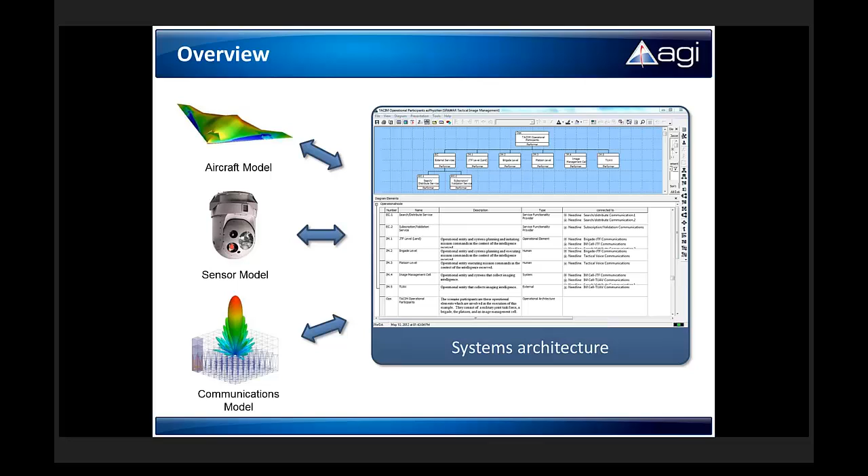If we get started, we might look at our systems architecture in a tool like GENESYS or Core. We have the representation of our system and its parts, which might include references to the aircraft model. Let's say we're talking about an unmanned aircraft. We might have aircraft model representations, sensor model information, or communications model—all the various important parts of the subsystems and the requirements for those. They might be mentioned or listed somewhere in our systems model, but they're not necessarily integrated with each other. That's one of the things we can do with STK.

We can use STK for collaborative system design and analysis. So if I start with my aircraft model—and by that I mean the physical representation of the model, the size and position of all the components, also the performance of that aircraft, so how fast does it go, how high does it fly.

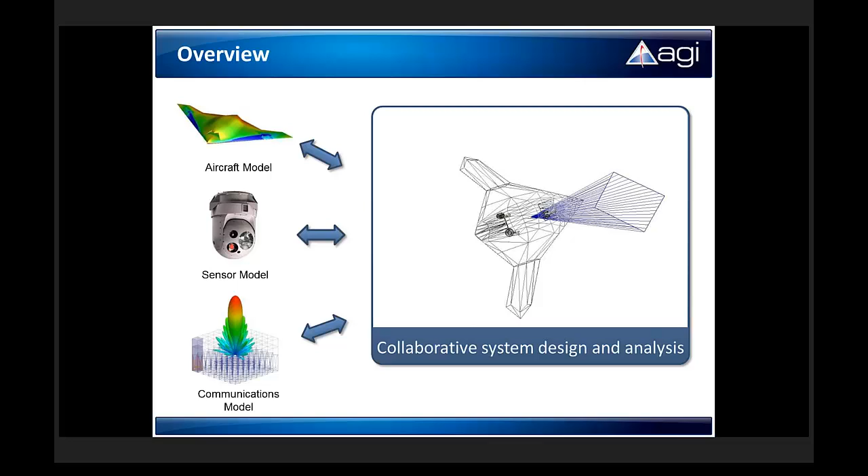To that I can add my sensor model. I know that my sensor, whatever sensor type I have, might have a certain resolution or capability as it stands on its own. But when I place that on my aircraft at a specific location, I can look at, in STK, combining my sensor model with my aircraft model. So as my aircraft maneuvers—maybe it turns and banks—that will affect the ability of my sensor to see things. Additionally, if while iterating on my aircraft model I add a new strake or piece of structure, that might impede the view of my sensor, and I could model that very easily within STK.

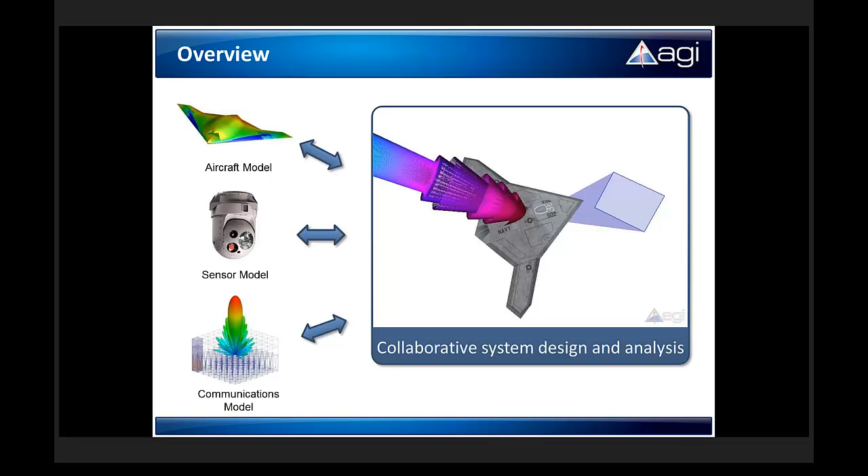Similarly, with the communications model—especially for an unmanned aircraft—communications are very important. Just like with the sensor, my antennas aren't ubiquitous; they exist at specific locations, and those locations may affect their performance. Also, as my aircraft maneuvers, that affects my communications performance, and so on. What this allows us to do inside STK is get a full representation of our aircraft, so now we see not only how each of the systems will work, but how they'll work collaboratively.

Additionally, we can look at mission-specific analysis. This unmanned aircraft doesn't exist in a vacuum; we didn't build it just to put it on a stand somewhere. We have missions, and those missions can vary—different locations, different purposes—and we need to be able to exercise our systems to make sure they not only function together, but function in these different mission environments.

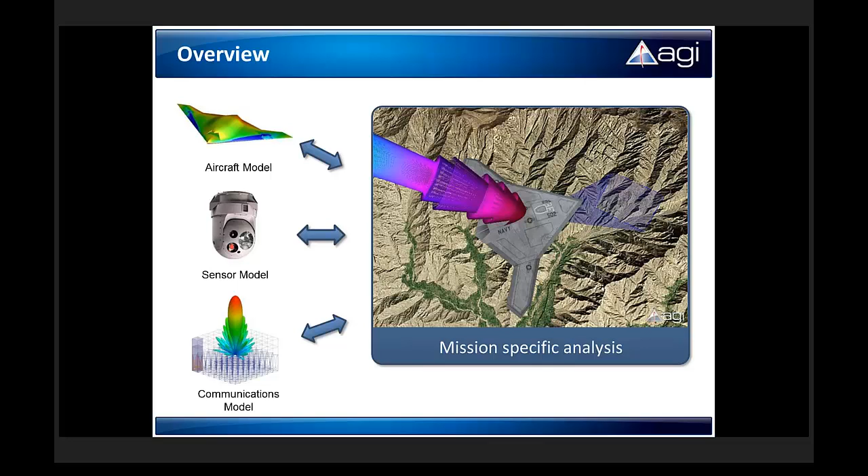If I'm flying my aircraft over the mountainous region of Afghanistan, it might be affected differently than if I'm in Singapore, where it's hot and humid and not as mountainous. So I can look at this to understand each specific mission thread and evaluate my system as a whole.

So if I take my unmanned aircraft, I want to take a picture of something. I need to use my sensor to take that picture, fly the aircraft to put it in the appropriate position, and communicate that picture up through my communication means to whoever wants to view it.

So we can view that all in STK, and here we have a representation, this colorized heat map that shows what we're able to see and how well we can see it.

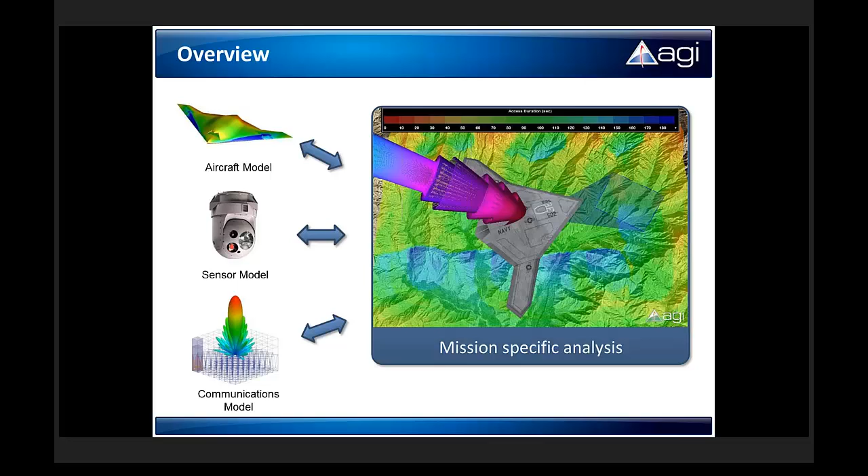The ultimate goal is end-to-end system design. So I start with whatever requirements I have, or whatever my system model might be, like in Core or GENESYS. I iterate on that model, combine it, get a full representation throughout the system together, and as we implement that system, incorporate that analysis back into my system model.

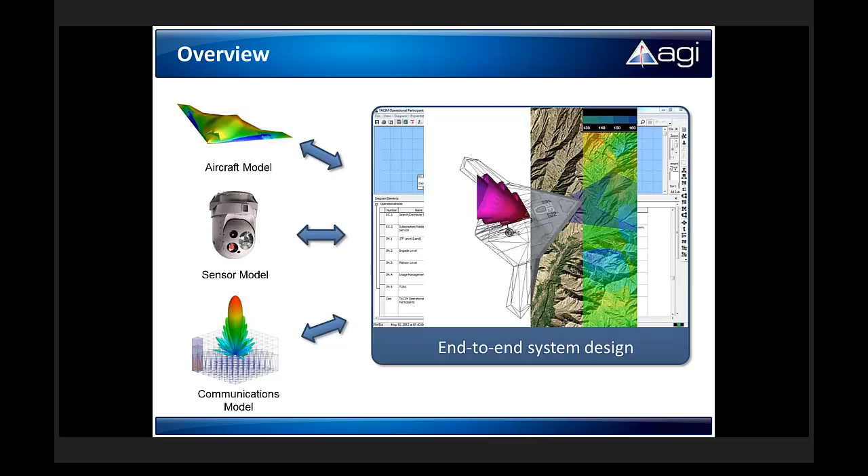So how do we do this in STK? What are the models that we can use? Well, we have a couple different models.

STK focuses on dynamic objects. One of the things we start with is vehicle motion models, like aircraft. STK originally started as a satellite tool, so we can model the motion of aircraft, satellites, ships, ground vehicles, underwater vehicles, or static objects like facilities. We want to look at their position and attitude because that will affect their subsystems.

Additionally, we can apply sensors. We can add a sensor to any of these objects, and that sensor might represent a radar or an EOIR sensor. We can look at how they're pointing, how they'll be affected in different missions, and also their environment, which leads me to the next point.

We model the environment very specifically in STK. We can model everything from the terrain on the ground to the atmosphere, different regions of the atmosphere, all the way up through space weather.

As I mentioned, STK is a very powerful satellite tool as well. We can model missions on Jupiter as well as we can model missions on Earth.

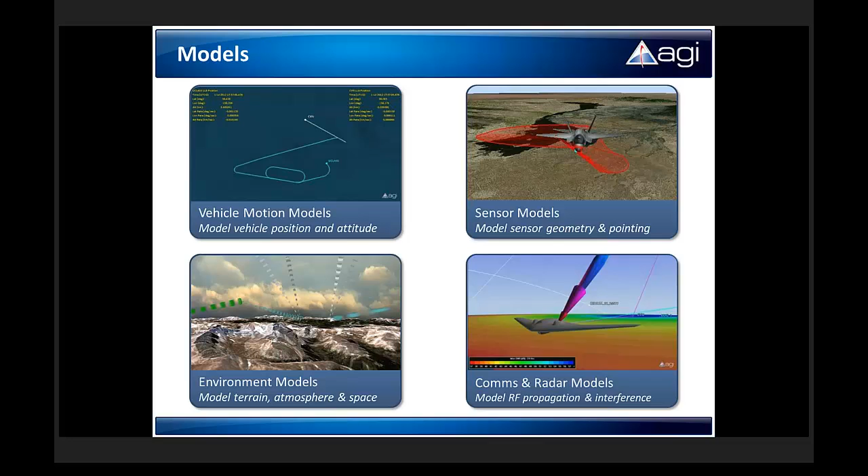One of the very specific models that our customers use fairly often are our comms and radar models. Again, it's designed to be dynamic, so we have models of things like radar cross-sections, communication devices, both in space and on terrestrial means, and we can show their performance across a mission.

The next thing we do is take these models, combine them in such a way that they model our system, and then produce some type of analysis. In this case, we want to either simulate a mission, calculate the performance, evaluate how the systems work together, or explore some different design space.

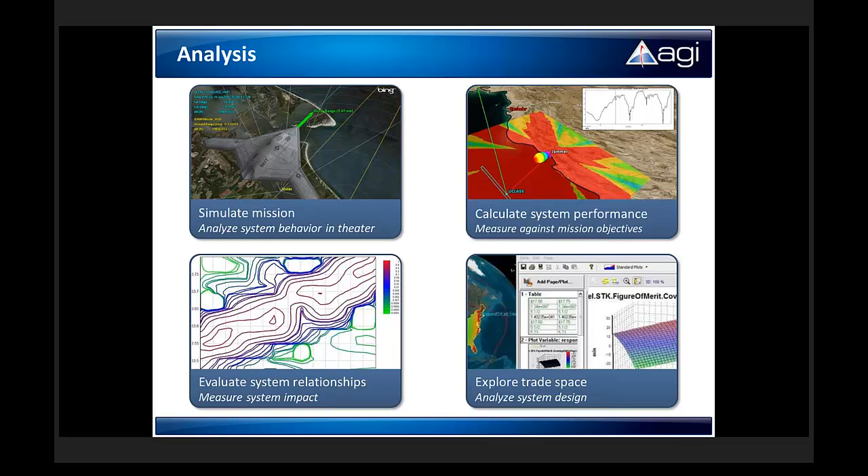We have the ability to not only calculate this, but display it in a way that makes sense, either through graphs, reports, or visually, which leads me to the next section.

One of the things about STK that most people notice very quickly, very early on, is our 3D and 2D visualization. All the pictures and videos I've shown so far, and the ones I'll show throughout my presentation, are directly from STK. We have the ability to model objects, so aircraft, any different type of aircraft, ground vehicles, ships.

We can model the terrain, so we import terrain sources to represent mountains or urban areas, and then we can convey these results in graphs, reports, charts, videos, images.

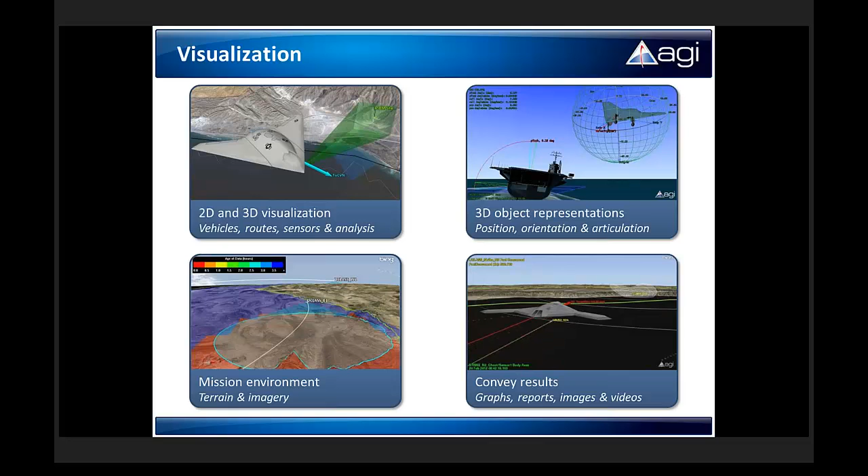The idea being that the visualization isn't the end product of STK, the analysis is the end product, but taking some of these complicated concepts, we are easily able to explain them and demonstrate them to various stakeholders who may or may not be as technical, using this 2D and 3D visualization. Okay, so we've talked about modeling the system, the different models that we have available.

We talked a little bit about analysis, that we can produce some analysis, and then the ability to convey results. So these are the core tenets of STK. To that, we can apply this ability to collaborate, the sharing of models between different users, and then most importantly for this conversation, the ability to integrate.

So we can integrate STK with many different tools, and that's specifically what I'm going to talk about in the next upcoming slide.

So if we look at the reason for integrations - I'm going to level with you right now, I don't know a whole lot about MBSE. I'm kind of new to the whole systems engineering game. Besides some requirements work I did very early on in my career, it's only been about 1.5 years I've been re-engaged with MBSE.

One of the things we like to do at AGI is when we get a hold of a user who is brand new to our tools like STK, we like to get in front of them and learn about their experience. A new user has a lot of good insight - they can tell us things that don't make sense, whereas an expert might share comments about what they'd like to see changed, but it's the person that just uses it who has real valuable insight.

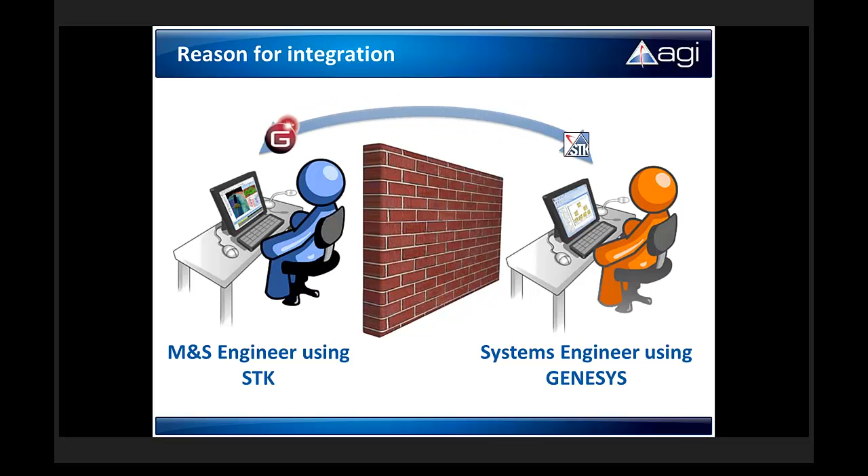So I want to move from a document-driven process to an actual direct linkage. The goal would be not to replace and say one person uses every tool, but to say to the guy that uses STK and the guy that uses GENESYS, if you need to exchange information, that could be done directly now. The idea is I want to reduce the time it takes to iterate on these designs. So if I need a piece of analysis from STK, I can zap that right into GENESYS, either by the STK user or the GENESYS user.

As my requirements change or my system model changes in GENESYS, I should be able to zap that change into STK. This will allow people more access to the different pieces of analysis and allow more people to verify the system as they go through the different iterations.

Now, by no means am I saying this will start and end with STK or GENESYS. At AGI, we have a specific corporate initiative we call MSAF, which is similar to this. We want to integrate STK with many other tools that our customers use, so that rather than having these different stovepipes, we might still have expert users, but the tools are integrated for exchanging data - so my STK user sees information in a format they're used to, and my GENESYS user might see STK information in GENESYS, but in a format that they're familiar with.

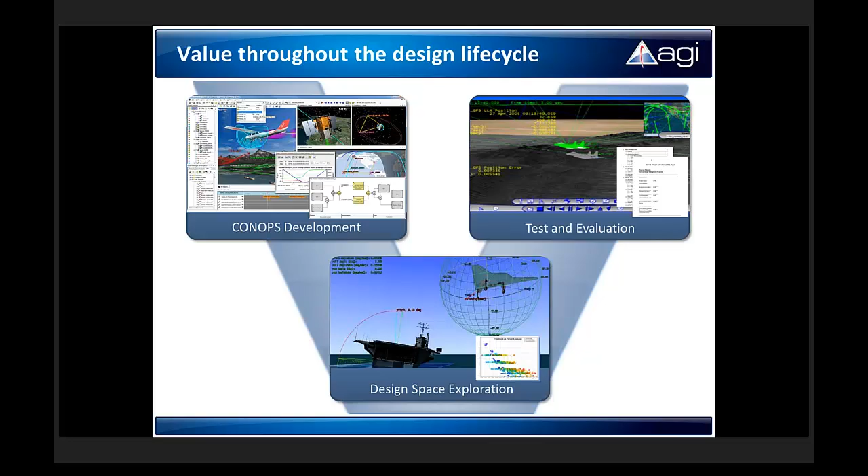Some people listening might be thinking, obviously this makes sense - it's a logical next step of MBSE or systems engineering, expanding beyond our system model into the tools we're using to develop that model. That's good, but the problem is the execution of that can be difficult.

So what I want to show is an example integration. I certainly recognize that many systems engineers are used to starting with a set of requirements and working out from that set. But those requirements don't necessarily come from the ether.

We have a lot of customers, STK customers, that sit on the far left side of a product or program. They use STK to develop the basic initial ConOps for a system. So what I want to look at is a model for those customers.

We would start with STK, developing the initial ConOps. From within the STK GUI, we'll communicate what we've created to GENESYS, and have GENESYS create the linkages between the subsystems, take information from STK and populate it in the appropriate fields, and then finally I want to see some information back in STK.

Now the software in this case that I've used to do this is STK version 10.01 and GENESYS 1.1 Service Pack 5.

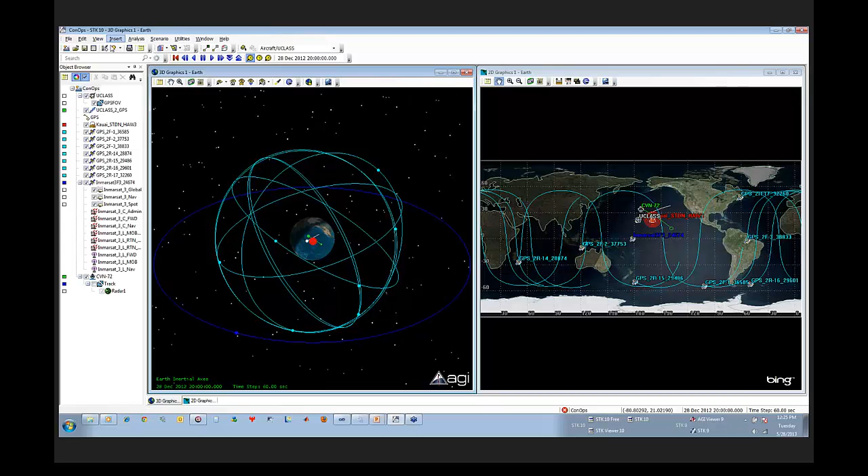These cyan satellites represent the GPS constellation - of course, there's a subset of those just to keep it simple. This blue object here, that's my communication satellite. And if I zoom up, we can see I have a representation of my unmanned aircraft, and this cone represents the field of view for its communication devices.

Now, I can animate this. Unfortunately, the animation doesn't come across very well over GoToMeeting like this, but take my word for it, I'll move around, everything will zoom around. I also have a couple other things.

First of all, the comm satellite I'm using is this Inmarsat satellite. In STK, we have a basic hierarchy as part of our scenario. It's object-oriented, so my Inmarsat has a bunch of transmitters and receivers associated with it. They all have properties, and I'm going to use this hierarchy as a basis for setting up my diagrams and the linkage between my objects.

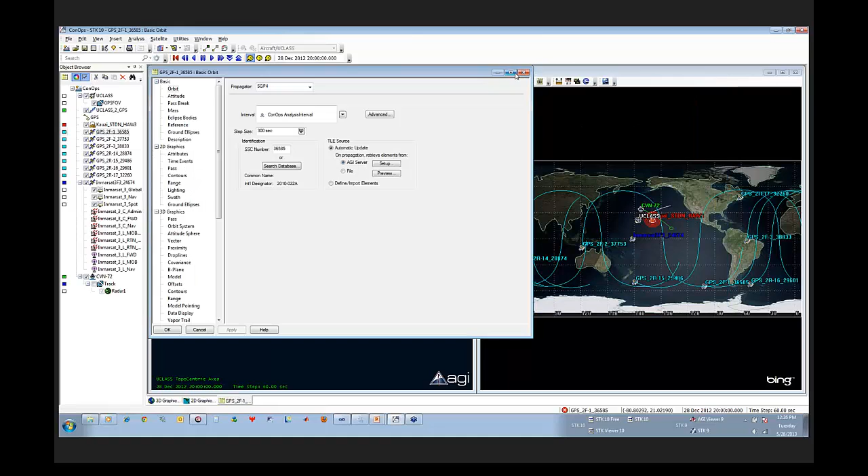If I look at one of these objects, here we can see the property panels referenced earlier in STK. There's a lot of properties, everything from how this shows up, to radar cross-section, and even the description. This is the GPS satellite, an actual representation of a certain satellite, and it's important we know this when designing our system, even the concept of operations, because maybe we're designing for the next version of GPS. We need to make sure this is all annotated.

So there's a lot of properties that I have set up in STK, and what I want to do now is export this data to GENESYS.

I'm in my STK GUI. I'm going to right-click, and I have this custom menu. If I click on export to GENESYS, I don't have a lot of options. First I want to give myself a name - I'll call it ConOps UCLASS - and I have the ability to create a certain number of diagrams. Here I'm going to say I want a hierarchy diagram. What that's going to do is, when I load all this information into GENESYS, it's going to send me back a diagram for visualization in STK using the GENESYS API and its ability to export visualization. So here I'm going to click export.

GENESYS has a certain login procedure, so I need to log in automatically. I am creating a brand new GENESYS project. I am exporting all the objects in my STK scenario, everything listed on the left-hand side, as well as their properties. It's creating those objects and properties in GENESYS, and then creating linkages between them. The last step is taking the hierarchy diagram I've checked, creating that as an image, and opening it up here in STK.

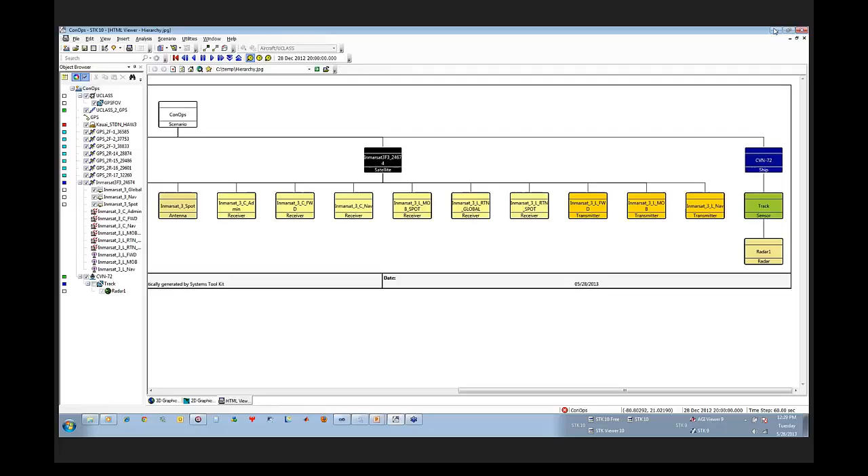So that's the hierarchy that I'm following when I create my project in GENESYS. Now I can't really do much with this diagram, it's just an image - I just want to see it in STK. But if I go into GENESYS, which is here... I can open up this project in GENESYS, and this was automatically created just now as I clicked that button, so we can explore my system in GENESYS here.

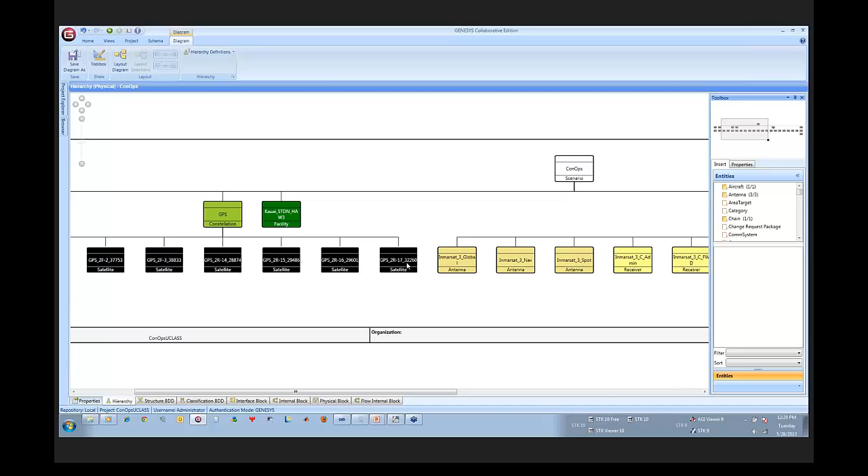So I'm going to start with - we can see that as part of my database I have these new objects that won't be part of your GENESYS installation because I made it as a custom schema. I'm going to go to the top level STK object, called a scenario. We can see my scenario represented here, and I can look at that same diagram I saw in STK. Now this diagram is interactive, so if I click on one of these objects like the GPS satellite, we can see all the pieces of information that were contained in STK, specific information about the SSC number, which is like a satellite identifier, the name, and all that kind of stuff, which we got from STK.

But then if I jump to my ground station here, we do have some properties that aren't necessarily contained in my default GENESYS schema, things like my latitude and longitude for my facility. So I'm saying that this Kauai facility represents my ground control station for my aircraft. It exists at a specific location on the globe, which is a property of this object, and I want to specify that. Eventually, it would get to the point where we could change this longitude in GENESYS and say, well, I want to move this facility, and we could change it and then see that change communicated into STK.

So this was a very simple example. If I go back to my PowerPoint presentation, the idea being that we could create this interaction between STK and GENESYS that allows us to fully interact throughout the life cycle of a program using different products.

And I'll say I'm kind of a nightmare customer in this case.

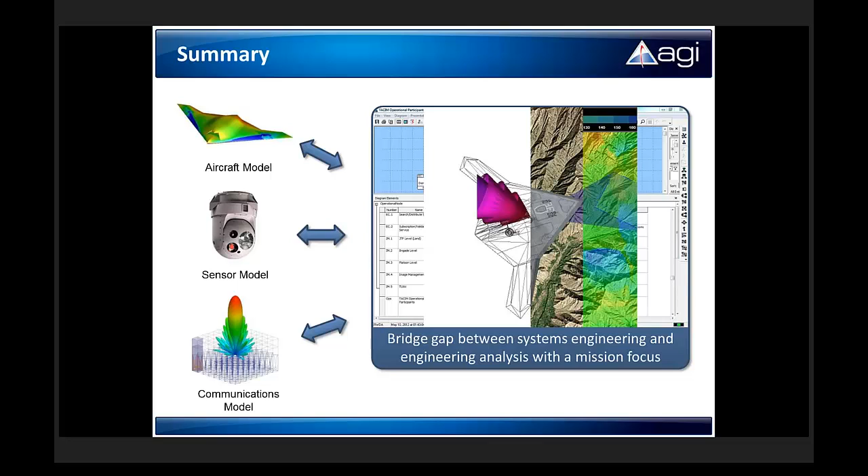I know, as I mentioned previously, next to nothing about MBSE. The first time I ever used GENESYS was when I started, when they sent it to me, so I didn't have any previous experience. I barely even opened up Core. And on my best day, I'm kind of a marginal programmer. But even with that, this was fairly easy to do. It didn't take a lot of effort. I had to ask a few questions and go through their example, but this kind of interaction, although very simplistic, was easy. We've shown this to a couple of mutual customers.

They're very excited, and so I think we're heading in the right direction with this type of interaction. Now, just finally, for those of you who are unfamiliar with STK, if you want to check it out, we have a free version you can get from our website. We have free training. Also, if you want to look at demonstrations of our paid products, you can request a demo. I'm sure my information will be listed on the Vitech website as part of this webinar, but if not, contact folks at Vitech and they can put you in touch with me. With that, I'm happy to answer any questions.